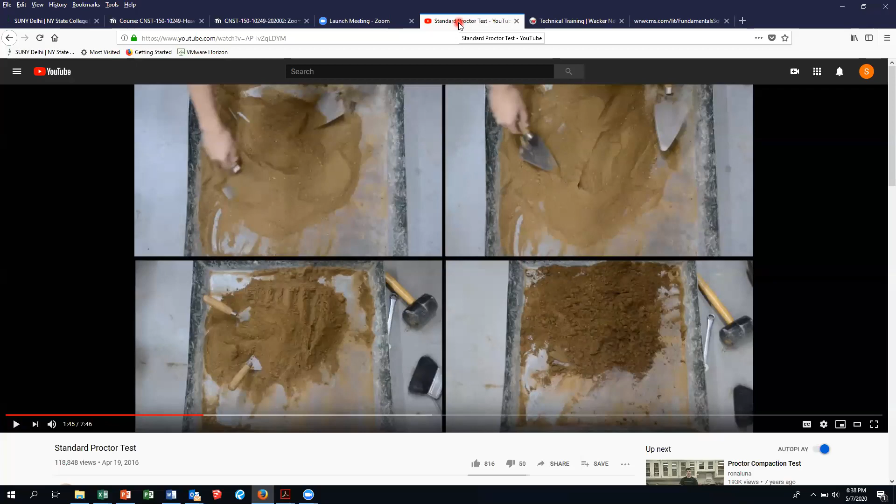So what we're going to do now is finish up on soils. The first thing we're going to do, can you see the YouTube?

I think, yeah, okay. We're not going to watch the whole 8-minute YouTube. Hopefully you've watched it. If you haven't, you should watch this before you come back in the fall, because you're going to be running these tests. This is a great screenshot because it really reinforces the fact that you're gathering at least 4, sometimes upwards of 6 samples at different moisture contents.

You can see the color of the soil as we start from the driest, just a little bit of water. Then they add another sample, okay, whether it's 5 pounds, 6 pounds, 7 pounds, depends on the size of the aggregate. That second sample has an increasing amount of water content, then the third one, and then the fourth one. Again, it's a great shot that really reinforces that you're not just running one proctor.

You're running 4 to 6, and then that takes us into the Excel we did. We started Monday night, where we had a data sheet. Half of the data sheet was for the dry unit weight determination, which was just hammering that soil in that proctor mold with the proctor hammer. And then, if you remember, after they were done weighing the mold with the compacted soil in it, they took the soil out of the mold and grabbed some of the soil.

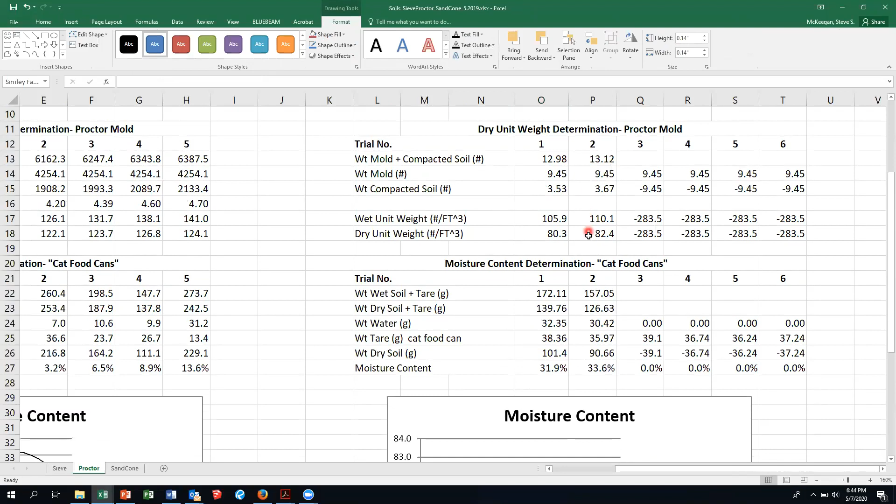Then for the next one, that was 82.4 and 33.6. 82.4, 33.6 is right about there. And there's your second data point.

Last few data points. Data 3, that's 13.19. That's 13.20.

13.18. 13.11. That's the beauty of Excel. Okay.

Now, right here, we go through and do a bunch of... that's 192.45 and 152.11. And that kicks in our moisture content.

Okay, so I don't know if you have all these numbers. So it'll take me 2 seconds. So this is 171 point, I should have done this earlier, 07, 184. Whoops, hit the wrong damn button. 167.

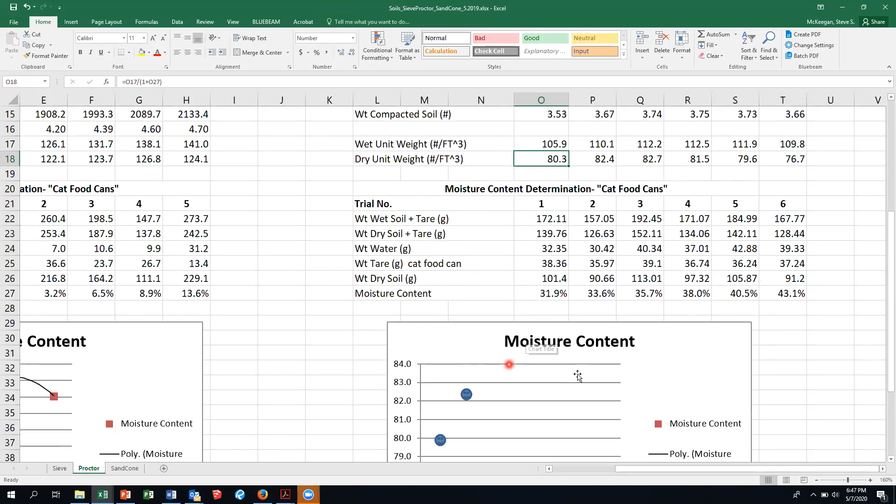So the next, I'll just do one more plot, and then eventually we're going to come back to this Proctor curve in another handout. So this was like 35 and close to 83. So there's 35, right there. And then guess what?

What is the dry unit weight doing? It comes up to a certain point, it reaches a maximum, and then it starts to go down with increasing moisture contents. And what you...

Yes. Well, the water is starting to displace the soil particles. Water is lighter than the soil particles. It's always a constant volume. So that's why your dry unit weight goes down. And that's, you always want to plot the dry unit weight.

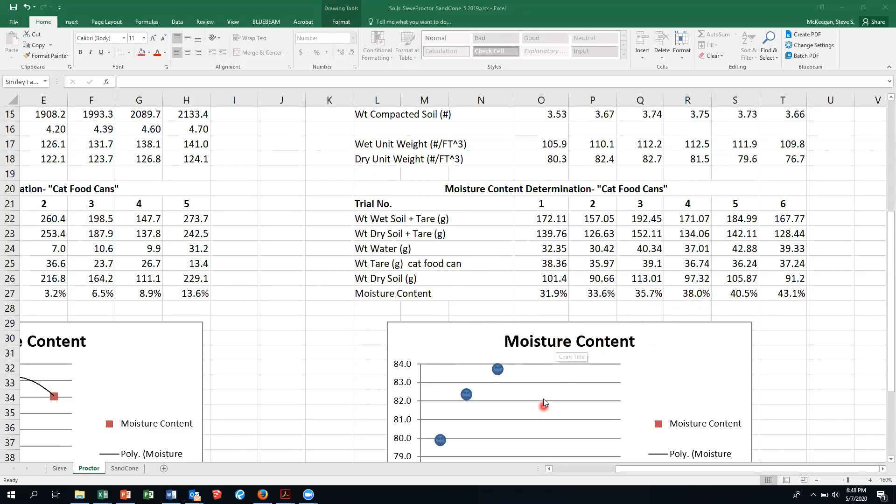So at 38 and 81.5, there's 38, and I'm just going to wing this, in 81.5. And then the last one was 43 and 76. Okay.

So there's your Proctor curve. And then the shape that you're going to do is you just connect the dots. All right. And there's, whoops, I always do that. So let's do my favorite button, which is the undo.

And right there, and we'll just play around with that. So there's your Proctor curve. Okay, I think this is the first time in 30 years I put smiley faces on a Proctor curve.

So the bottom line is, what do you do with that? What do you do with that curve? Well, the Proctor test is a lab test. And so now in the specifications, there are specifications, and you have this one.

This is soils handout number 2. It's in the soils folder at the top of Vanco Hall. And so here, this is the ET spec. Okay, and I'm not going to worry about this 3% drier or 2% wetter. We'll talk about that in the fall. But this is what we're looking at.

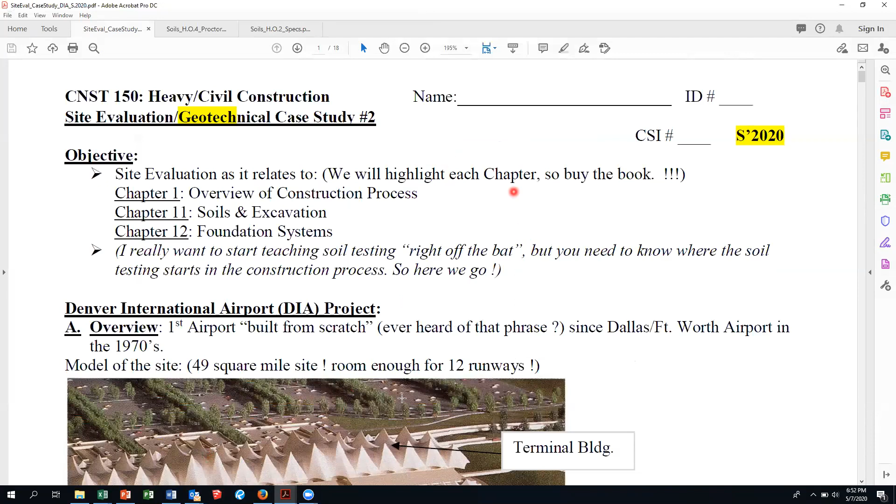So that brings us to the Denver case study. You have this in Vanco Hall. Hopefully you've taken a look at it. If you haven't, you might want to for the test, because I'm using a lot of the theory here.

So right under this week, Proctor nuke compaction. This lab packet soils is where the formula is for calculating dry unit weight. Handout number 4, using the Proctor, explaining the Proctor, is in this. And then I threw in the Excel that I've been using down below.

And then this site eval case study, DIA, stands for Denver International Airport, or Do It Again, had a slight cost overrun, a couple $2 billion. So let's go to the DIA case study.

Now, a lot of this, since we're just running out of time, remember we talked a little bit about this. This is the concrete graveyard after they had some issues with concrete. Here's an overview from the FAA tower. This is where they parked the birds.

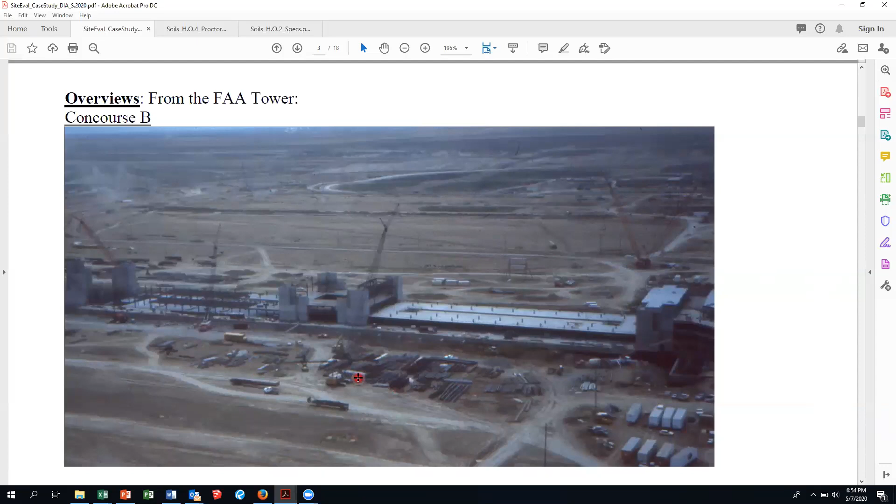So all of this soil had to be brought up, either cut or filled, to a subgrade elevation so that they could then place the concrete aprons, tarmacs, sometimes they call it, the runways themselves. Here's another shot, you can see the runway off in the distance under construction.

And here is a good pic. This is the original grade at this area. You can see where the power line was. And so what they did is called a mass balance, where they cut the high spots and move it over to the low spots.

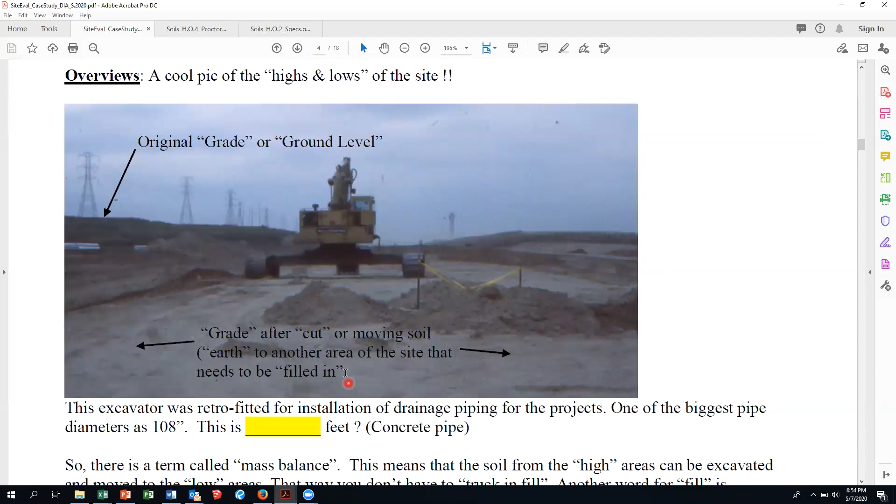Okay, so this is the grade after cut. We're moving soil, the earth, to another area on the site that needs to be filled. So cut and fill. This excavator was retrofitted for installation of drainage pipe, and just some really cool stuff. So there's our term, mass balance.

This is the machine that literally sliced the soil about anywhere from 8 to 12, maybe 18 to 24 inches into the soil. There's really no cobbles and boulders, if you will, out there. It's basically all clay, very small gravels, not big gravels.

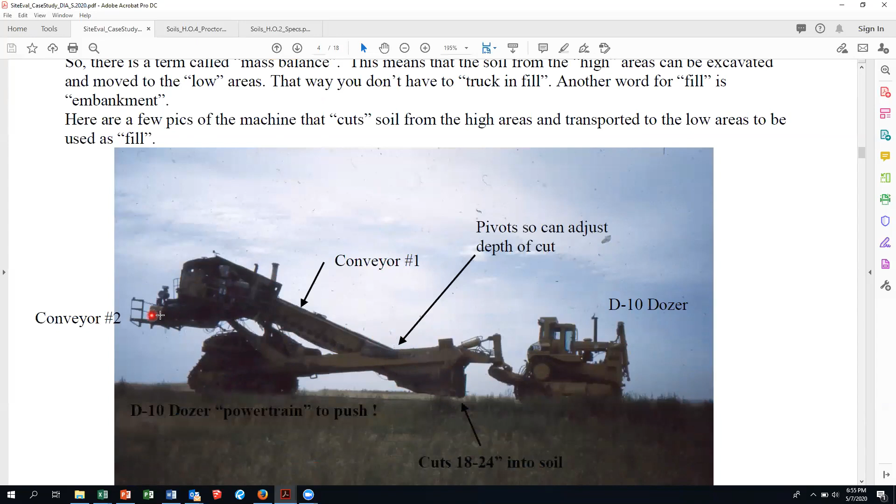But this thing is really cool. It's got a D10 powertrain to push it, a D10 dozer pulling it. And like I said, this thing pivots, so that part cuts into the soil, goes up this conveyor, goes into another conveyor at 90 degrees, and then burps out the side into these. These are called 777s.

They may have changed the number since then. This is called a belly dump. And so that's what they use to transport the soil from where they cut it, where they slice it, over to where they have to fill in.

Okay, and then they got grade stakes for fill. We're going to play around with that a little bit in surveying. So they're bringing up this subgrade, they're bringing it up to subgrade.

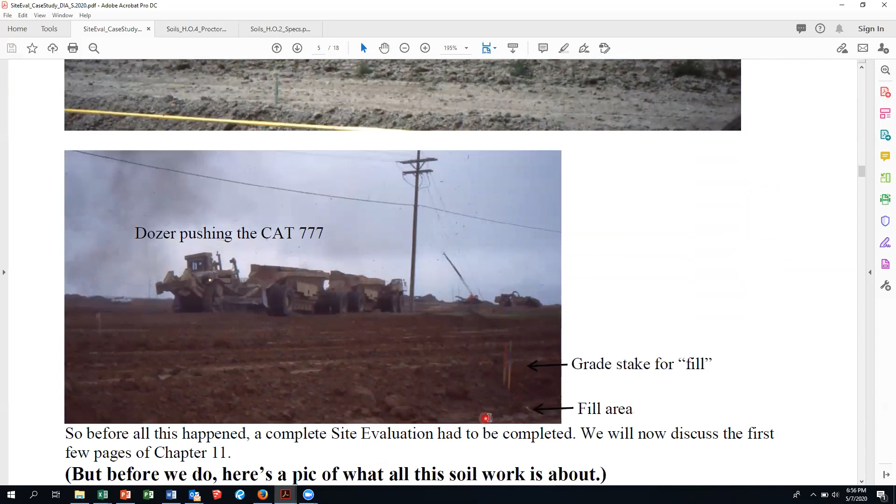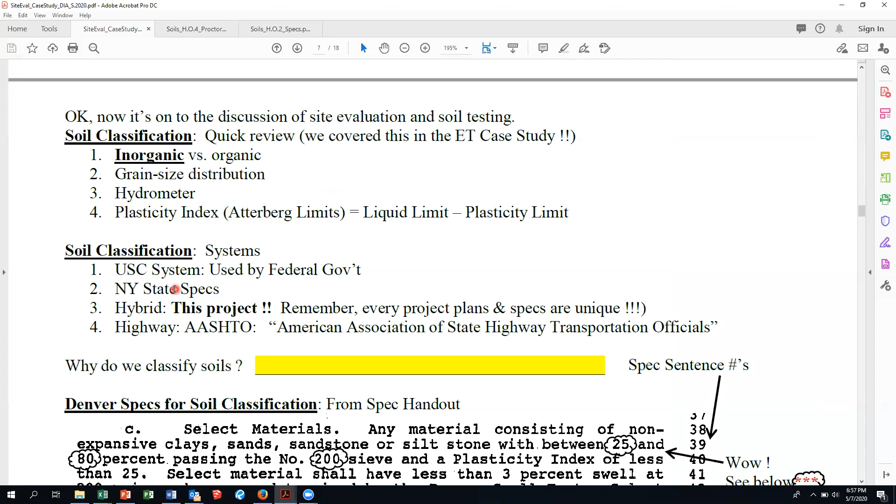This is why this handout's probably the best thing for you to use to study for the test. Why do we classify soil? What classification systems do we use? We just didn't get to New York State specs, we're going to actually play around with those in the lab in the fall. AASHTO is the highway, and then the hybrid is this project, it's a little bit of everything.

So here's the Denver specs for soil classification. They allow non-expansive clays or siltstones between 25 and 80% passing the number 200 sieve. So if it's more than 50% passing the 200 sieve, it's a fine-grained soil.

And it kicks in the left side of that chart that we generated, and I put it in. So here's the answer key.

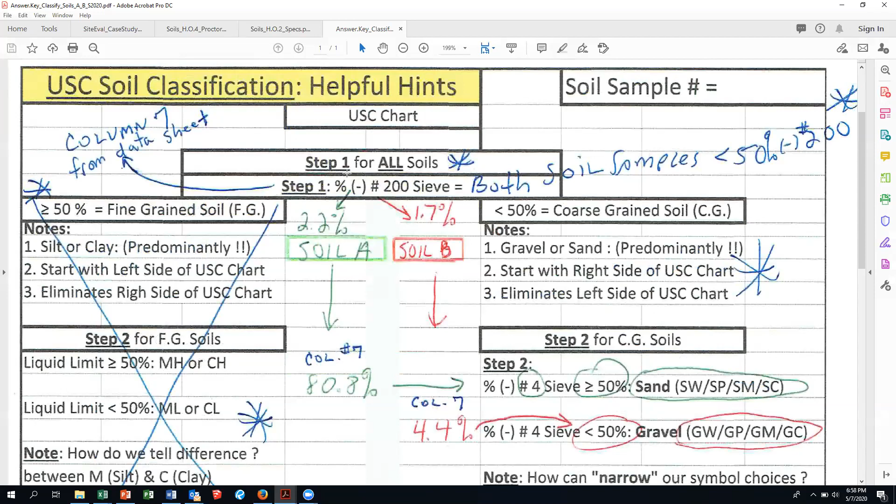Okay, here's the answer key for classifying that soil. Let me put this down here for the time being.

Both those soils were coarse grained because they had percentages less than 50% passing the 200 sieve. But if you had the Denver clay and you had anything greater than 50, then it would eliminate this part of the chart and this part would govern.

And then you got to look at something called the liquid limit. So I'll probably throw a question on here, one here and one here.

So that's a little background on that. They talk about sulfates - it has to have a maximum allowed sulfate content because sulfate is a naturally occurring compound in soil and it does attack concrete. And you can get a sulfate resistant type Portland cement.

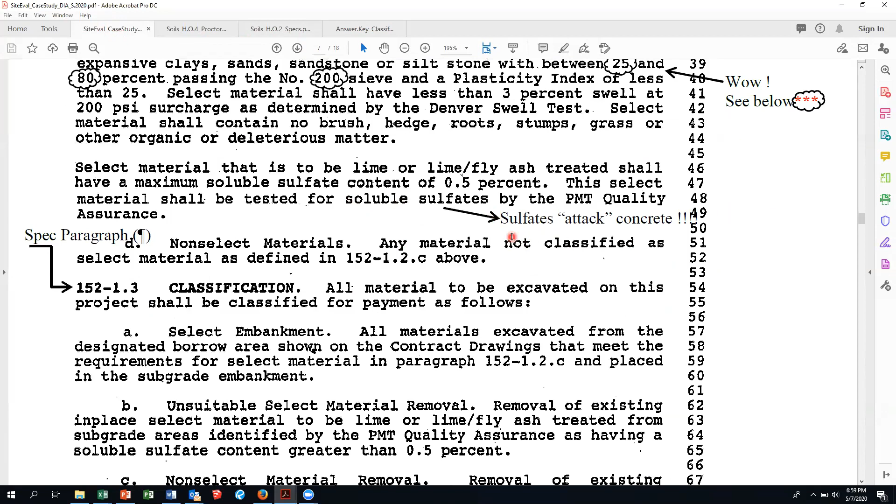Now the way they work it is a select material means that you can use it. So for these, you would do the hydrometer test, the plasticity, the liquid limit, because it is a fine-grained soil typically. If it doesn't meet any of the requirements, then it's called a non-select. Sometimes in certain projects, you'll see satisfactory and unsatisfactory.

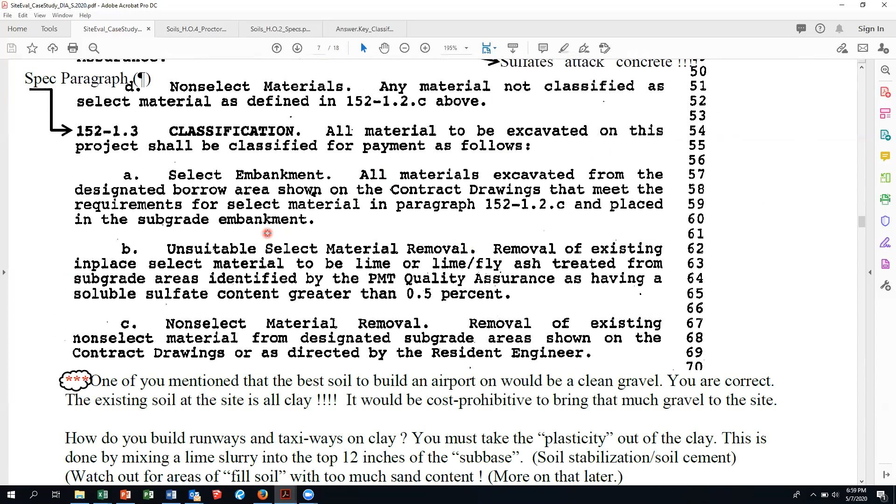So look through all these notes that I put on these specs. And then here's some - this is all my writing.

Years ago, somebody did mention the best soil to build an airport on would be clean gravel. But they didn't have that there - all they had was clay. It'd be way too cost prohibitive to bring that much gravel to the site. So that's where they do the soil cement or soil stabilization, where they're mixing that lime slurry. That's a little theory right there.

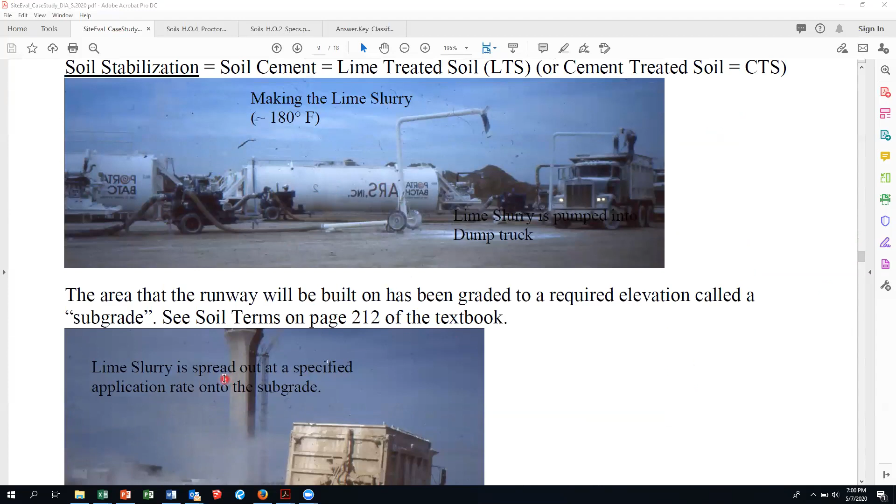So here's the lime slurry for Denver. It's mixed here, goes into this dump truck. There's a manifold on the back, and it looks like Christmas time in July. And then that's that big old rototiller that rototills that lime in and takes the plasticity out of the soil.

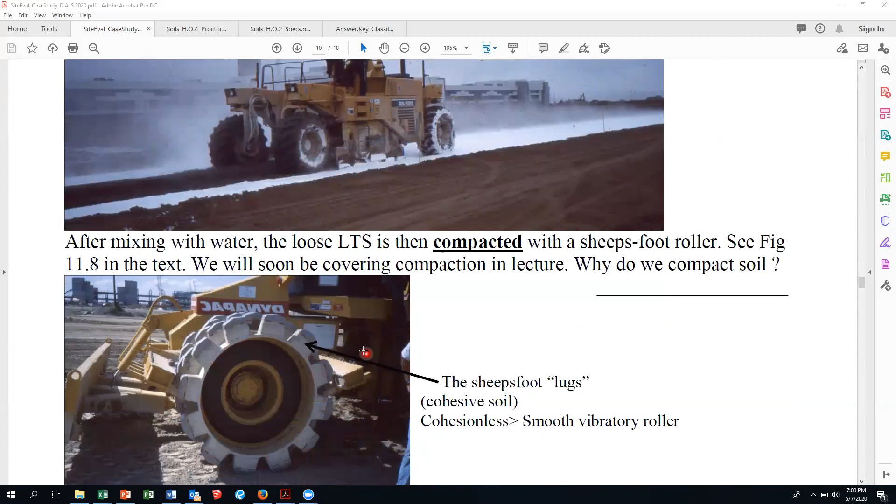And here's the sheep's foot roller that is used for cohesive soil. Cohesive soil is your clays and some silts. Cohesion-less - I don't know if I had a picture of it - this is for granular soils, you're going to use a smooth drum vibratory roller.

The sheep's foot has these lugs, and here was a great shot where this soil had been compacted. This soil definitely was just starting the compaction process. And so through repeated passes...

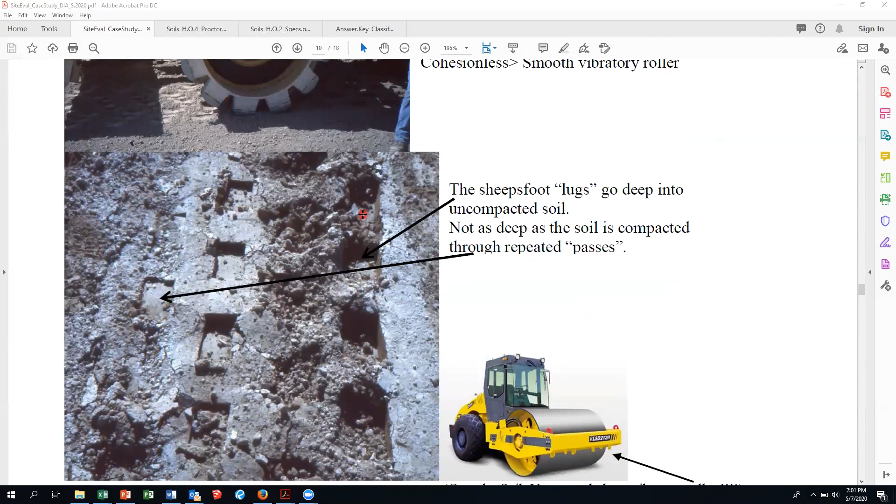Repeated passes by this machine, the sheep's foot roller, you're going to compact that soil, say to 95% of whatever the dry density was from this Proctor test. And there's the Proctor mold.

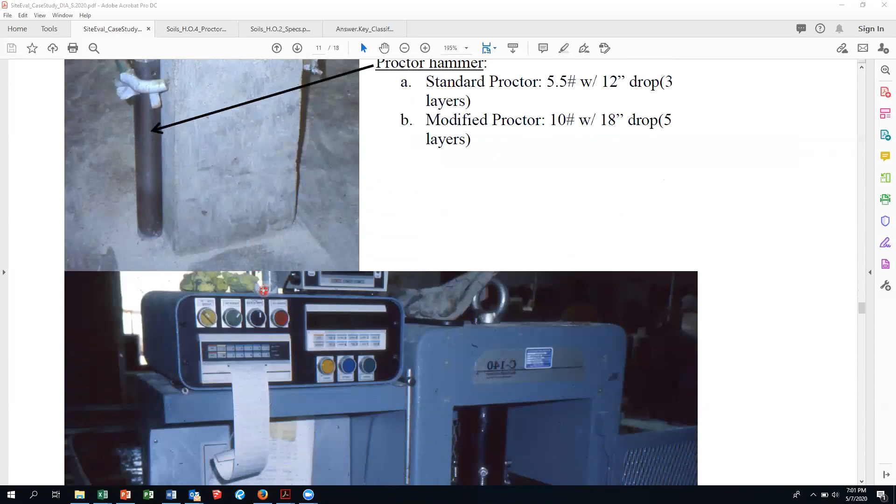So you've seen that. They also extruded what I call the soil hockey puck out of there because they had a certain spec for the strength of the lime treated soil. And they actually put that in a compression machine and they broke it.

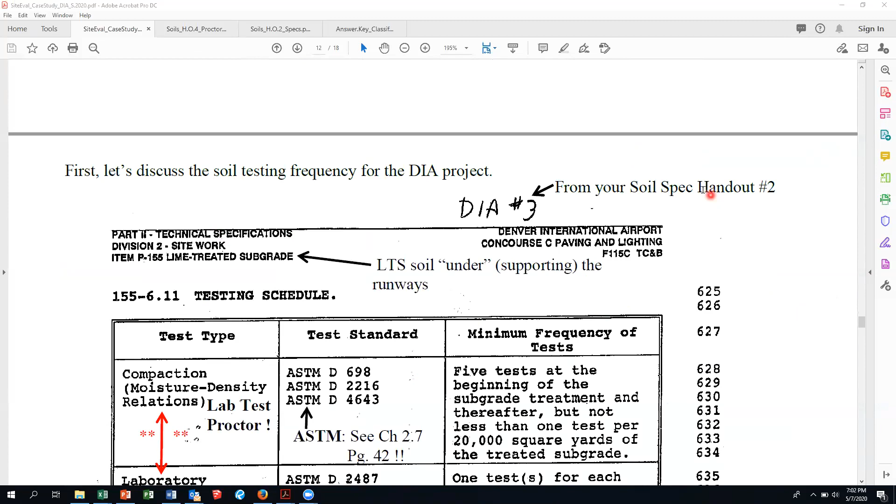So here's the frequency of testing. Moisture density relations, that's the lab test. That's tied in with laboratory classification. You classify it to see if it meets the requirements for that specific type of project.

So they say 5 tests at the beginning of the subgrade treatment and thereafter, but not less than 1 test per 20,000 square yards. Well, why are they talking about square yards? They're actually talking about area, a footprint, if you will, of the concourse, the tarmac, the apron where the airplanes park, and the runways.

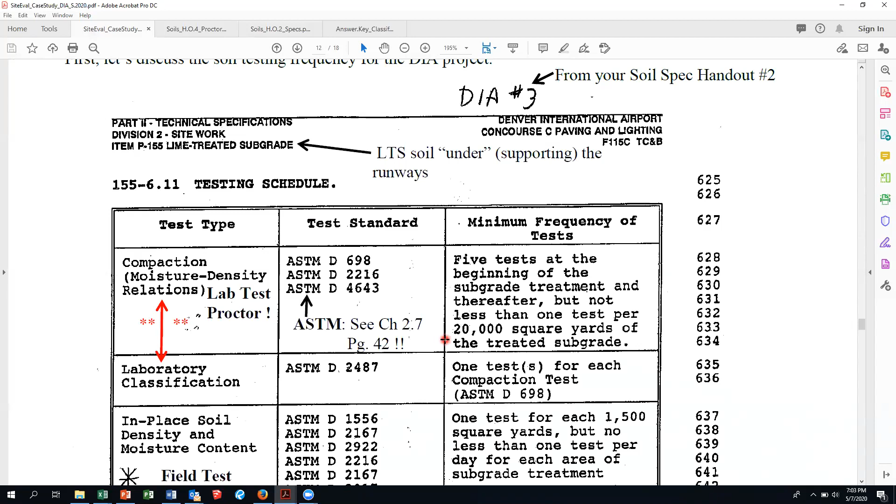So basically say every 20,000 square yards, not square feet. So I'm going to multiply that by times 9. So that's about every 400 feet by 400 feet, you're going to do a Proctor test.

In place soil density and moisture - this is a field test. This is my writing: 1 test for every 1,500 square yards. So 1,500 times 9, and you will see some units on the test. You got to know how to convert from, say, square yards to square feet and vice versa. And so you got to know your units.

Times 9 equals, and that's about every 115 by 115.

pH, that makes sense, lime content. That's the lime used for soil stabilization. There's your compressive strength. It had to be at least 250 PSI in 5 days at 100 degrees.

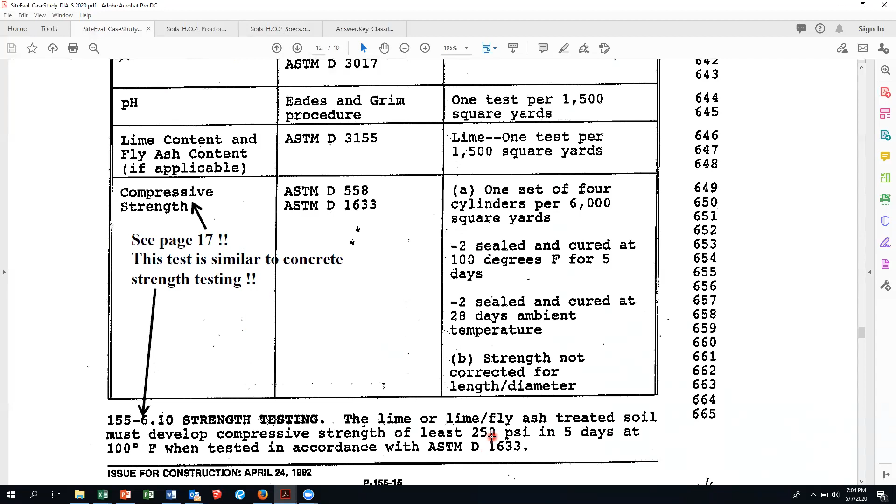Maybe if I can get some clay, we'll actually do some soil cement. We'll mix it, break it in 5 days, and see if it comes up to 250 PSI. It's very similar to the compression cylinders you fabricated for statics and strengths.

This was soil only, in other words, if they were not doing soil cement.

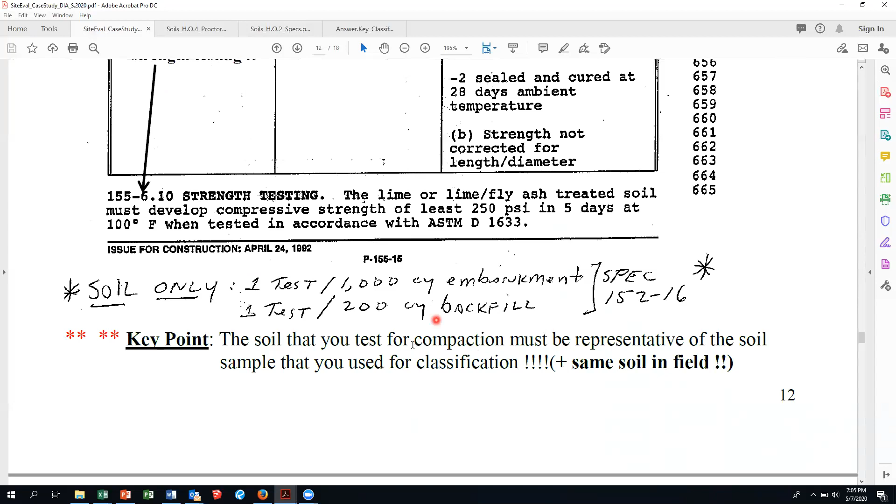Now here's the key point, that's why I put a lot of asterisks there. The soil that you test for compaction must be representative of the soil sample you used for classification. In other words, the soil you tested in the lab better be the same type of soil you're testing in the field when you compare the Proctor curve. That's key, page 12, that is key.

So there's some recap, anytime I say that, recap it. The Proctor curves are used as a standard for site compaction. Long-term soil settling is called consolidation. That's a whole nother type of study, as is the word surcharge. We'll talk a little bit about that next semester.

So here we go, back to the Denver spec for compaction, lime soil mixture. The field density of the compacted mixture, lime and soil in the field, shall be at least 98% of the maximum density of the laboratory specimens prepared by the contractor. That's the Proctor.

And right here, this 98%, they're talking about dry density, sometimes called the degree of compaction, sometimes called relative compaction. Because it's 98%, they'll just say 98% of the Proctor. If it's 95, they'll say 95% of the Proctor. So that's some of the terminology you use.

I've emailed a couple of you who are interested in soils, and a couple of you interested in surveying. But if you get to work for, say, an excavator, or even better, a material testing company, man, read up on this. This will help you for your job.

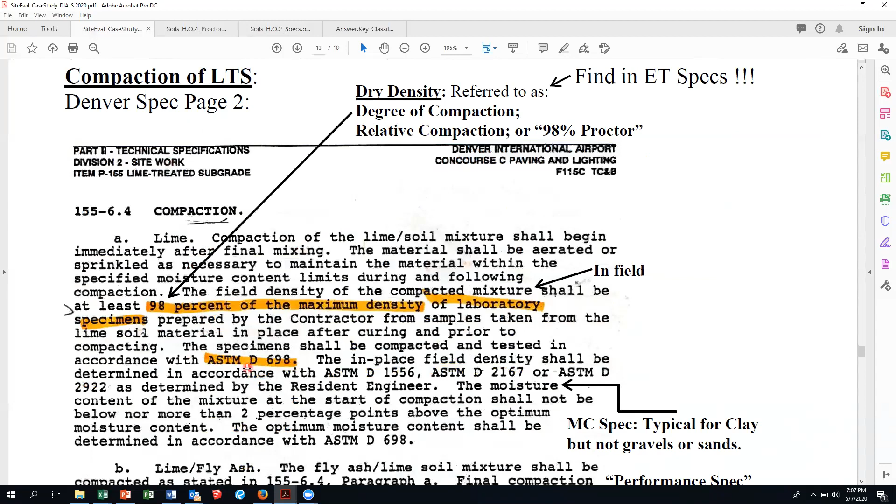The moisture content, this is a typical spec for clay where they want it always on the wet side of optimum. I'm not going to test you on that. I'm going to test you on a little chart that I've made for you.

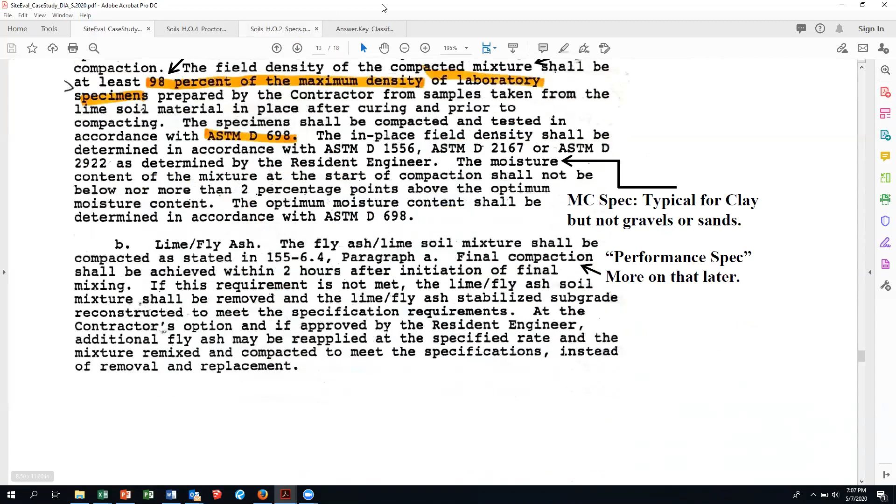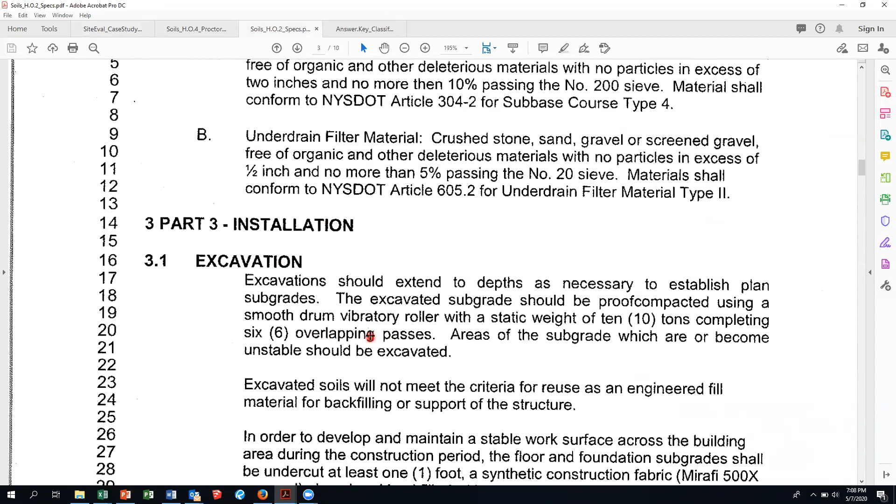This is a performance spec. It's identical to what we called the execution part of the ET spec, remember, or installation part. Part 1 was general information, part 2 was products, part 3 of the ET spec was installation. It's like a performance spec, this is how you have to perform it, and so on. So I just showed you that, for example.

Well, what do you use to test in the field? You got to get moisture and density in the field. It's called a nuclear density meter, or the nuke test. Now they're actually making non-nuclear versions. It's fascinating, the technology is unbelievable.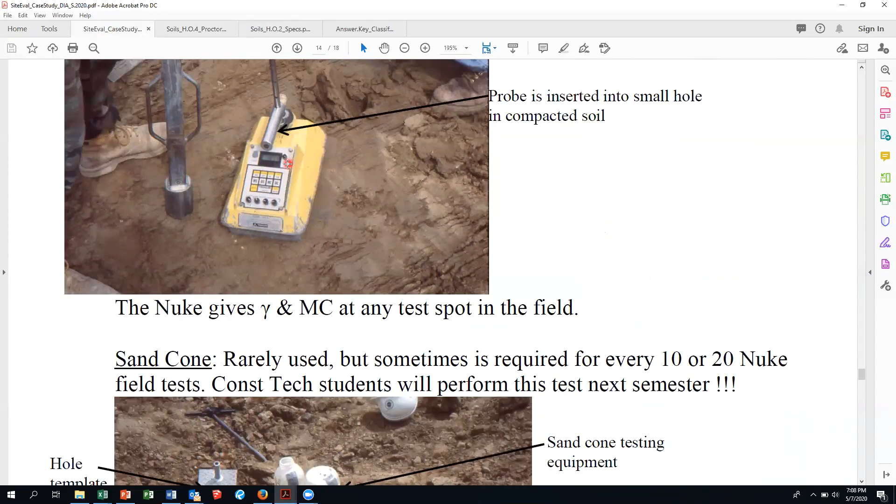There's a, where is it? It's right here, this is the hole template. So you put this template right here where the nuke is before you set the nuke in. You put that template, say, over here. You put this, oh my God, it's almost like a footing, help me out, a footing spike or whatever.

And you take this thing, which actually has the spike in it, and you pound a hole in the ground. Then the nuke sits on that, and this is a plunger that starts out at the top, and when you plunge it down, there's a steel probe that goes into that hole. And little photon torpedoes, that's technical from Star Trek, will tell you very quickly what the moisture and density is for the soil in the field.

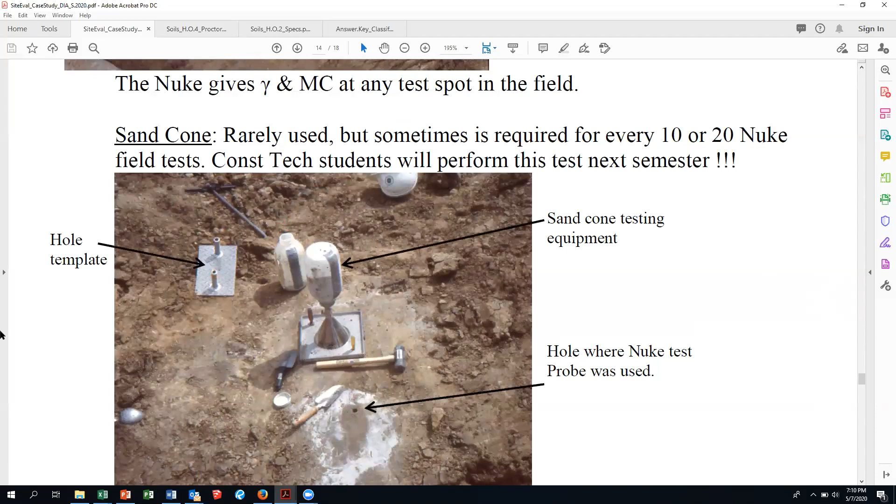Okay, this is the sand cone. You might want to remember that for the test. The Romans used it when they built the aqueducts at Segovia and the roads that supported Segovia. We don't have a nuke because we don't want the nuclear issues, a lot of paperwork for that, and they're expensive. So we use the Roman sand cones, that's a joke. I don't have time to go into that, but you will actually run that test in the fall.

They also do something for testing stability. I'll show you what's known as shaky silt in the fall. Also show you the taste test for soil. Grosses people out, but you can do it. Just make sure it's inorganic soil.

This is what you've got to study for the test this coming Wednesday, May 13th.

You run the proctor, that's the lab test. You graph the proctor and highlight on the graph the maximum density and optimum moisture content. Now for clay, the moistures are very high. For granular soils, like gravels and sands, they're much, much lower.

The DIA specs, that paragraph said that the percent proctor, or relative compaction, was 98% of the maximum dry density.

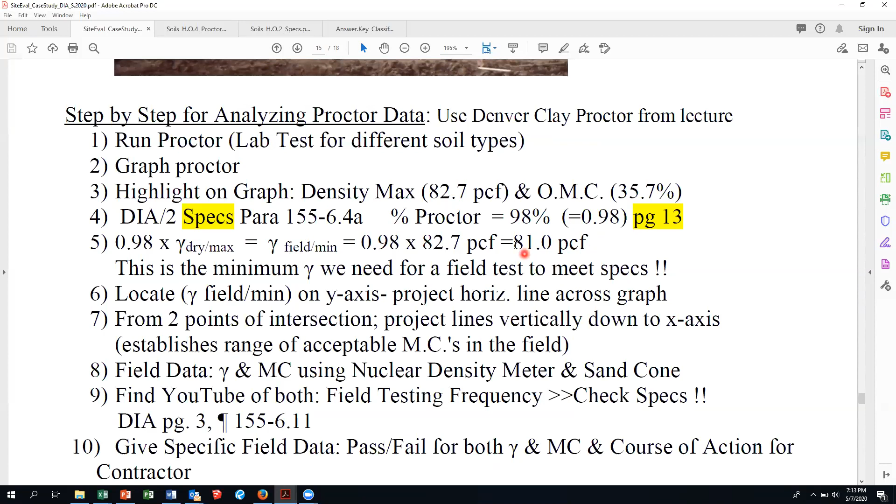PCF, pounds per cubic foot. So we need the nuclear density meter, or the Roman sand cone, to register at least 81 pounds per cubic foot minimum for us to meet compaction in the field. If it was 95%, then the standard is not as high.

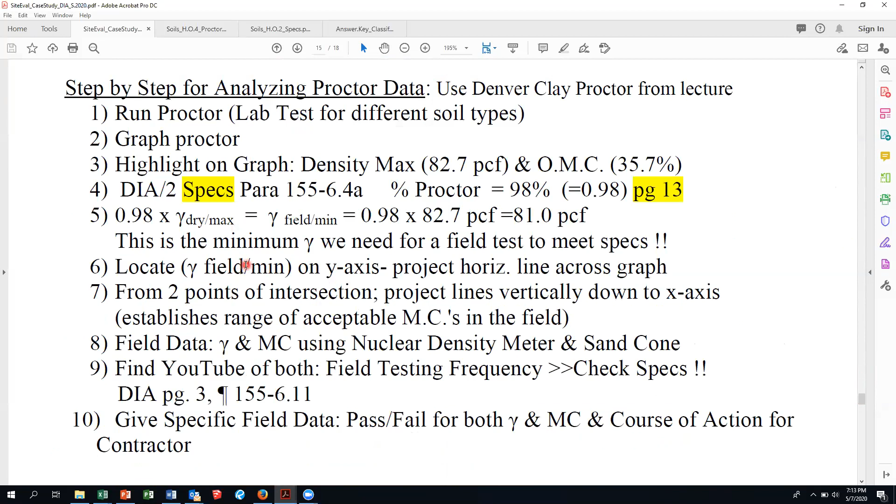So I used it for Denver, even though it was from Texas. I said, close enough for government work. And...

So again, the end of 15, the beginning of 16. I'll tell you what, you go work for somebody and get a good command of this theory, their heads are going to turn. Soils are very misunderstood.

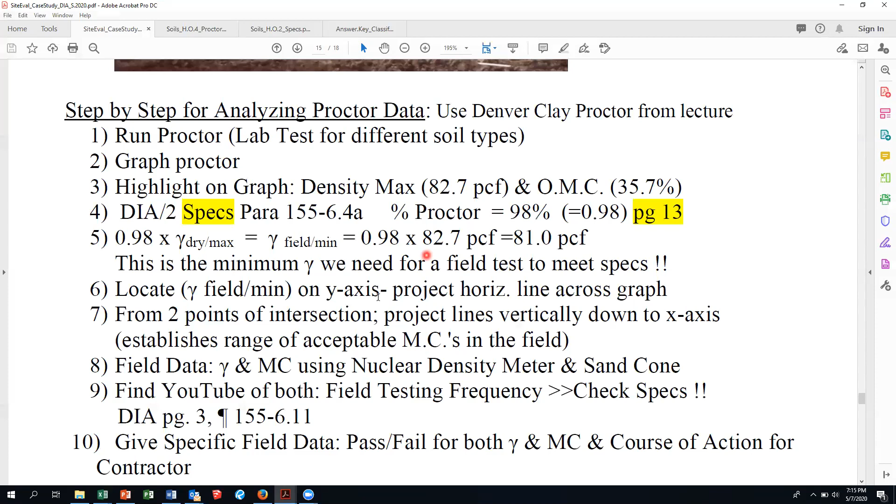So everything we talked about here, right? 98% of that number is 81, 81 pounds per cubic foot.

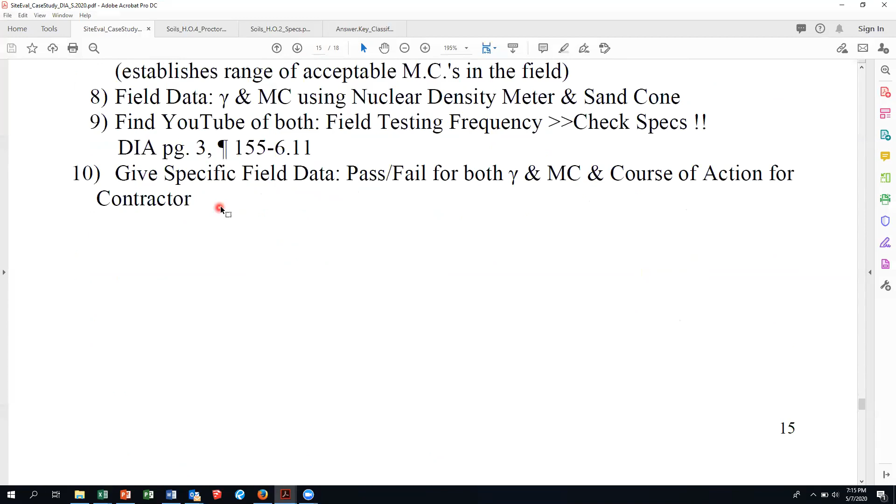So what you'll do is, step 6 says to locate a line across the graph for that minimum field density. Well, if you go to 98% of the maximum 82.7, which is 81, draw a line across the graph. How many points do you intersect the proctor curve?

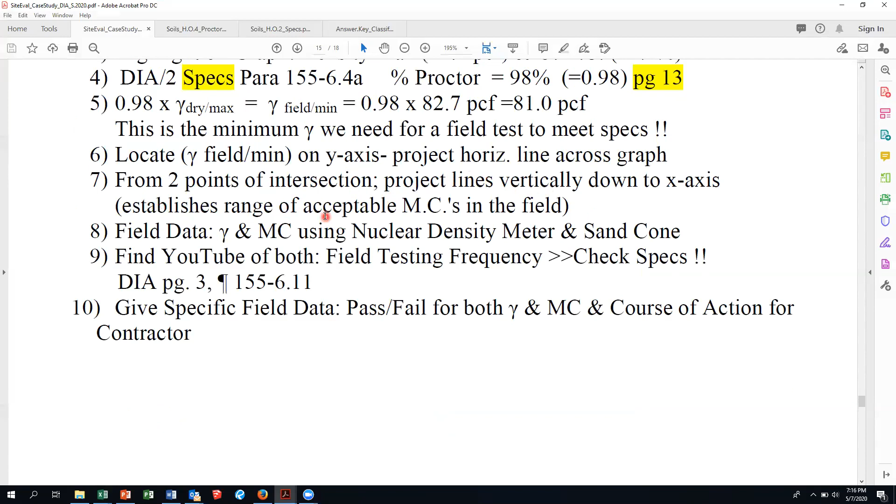Two — you intersect it here, and here. From the two points of intersection, project lines vertically down to the x-axis. It establishes a range of acceptable moisture contents in the field.

In other words, and it's not exact science, but it's damn close — between this point and this point, if you run that sheep's foot roller enough passes, up and down on the soil being compacted, you should be able to get 81 pounds per cubic foot, which is 98% of the maximum dry density you got in the field.

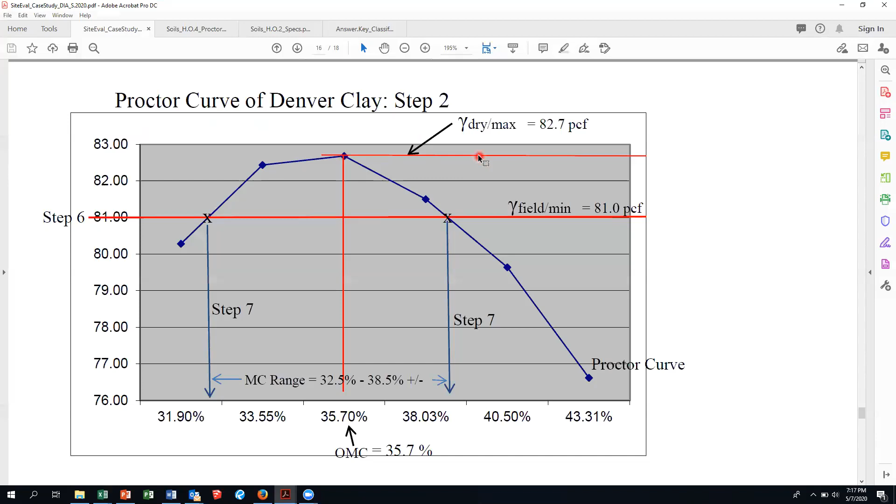Now, one thing we didn't talk about is when you move that soil from the high points to the low points that needed to be filled, you have to compact that soil in lifts, typically 8, sometimes 12 inches — L-I-F-T-S, basically a pancake. If you just move the dirt 4 feet vertically at a time and try to compact it, you'll never get the entire depth compacted to spec. You've got to do it in thin lifts. Does that make sense or not?

So, like I said, it's not back in 1977, so I won't smoke my Marlboro like my old teacher did. Okay.

So here, if our field test is between 32.5 and 38.5, we know with enough compactive effort of the machinery that we can get this minimum field density. So let's go through some of the tests.

These are actual tests that I made up. That's an oxymoron, sorry about that.

DIA, Denver International Airport, clay. Nuke results. We love nuclear power.

See if everybody's awake. You guys awake? Everybody's sleeping, holy shit, it's the third course in a row. I don't blame you, so, shouldn't have said that. Hey, it's my last Zoom. So, do we pass or do we fail?

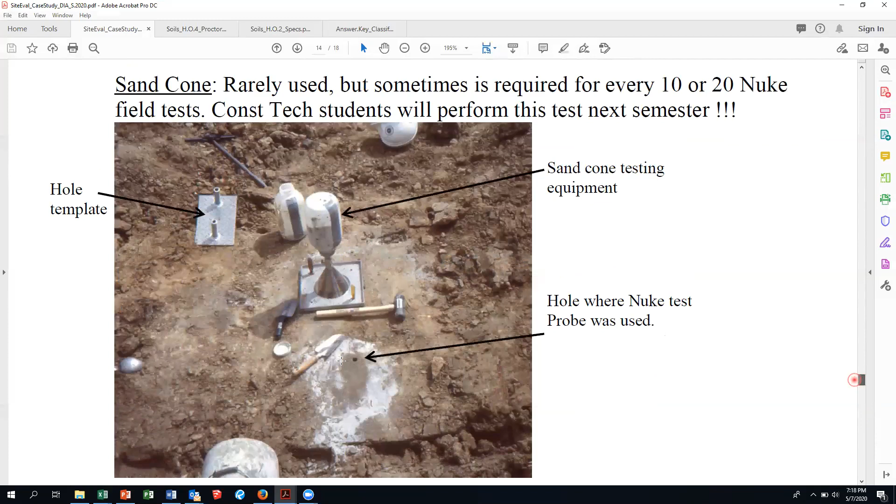So let's look at some test results. They're out in the field, using the nuclear density meter. And the nuclear meter, the little photon torpedoes from Star Trek, told me that the moisture content of the soil was 35%, and the density was 81.5 pounds per cubic foot. Well, 35 is in that range, and 81.5 is higher than 81.

This goes back to the YouTube video where they did that same horizontal line at 95%. They use 95, we use 98. 95% of whatever that maximum density or unit weight number was. Draw that line across, go right down, drop 2 vertical lines where it intersects the Proctor curve, and there's your acceptable range of water content. So we're just reinforcing what they said in that video.

Now let's go to another test. Don't forget that in the spec it said we had to run an in-place density test, the nuke, every 1,500 square yards. Let's say we went to another part of the runway, and the nuke told us our moisture was 36.5%, and our density was 76.5. Well, the moisture, 36.5, is still in that range, so we're good with the moisture. But we're low on the density, which had to be 81 pounds per cubic foot. That meant I don't have to mess around with the moisture, I just got to hit it with more passes with the sheep's foot roller and then retest it.

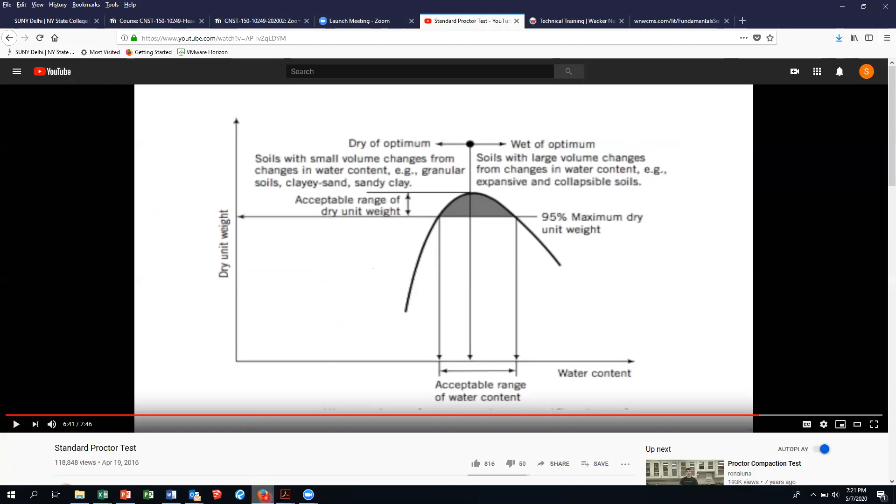So you do more passes with a sheep's foot roller. And the technicians and contractors are really good at knowing about how many passes it takes to get compaction. That's also part of the technical booklet that I had you look up on the internet, which gets into the science of the energy of a sheep's foot roller or a smooth drum roller. Don't forget, the soil you are analyzing with the field data versus the Proctor, they've got to be the same type of soil. Wait till you see some of the Denver Proctor data sheets I'm going to show you in August, it's really hard to do, it's an art.

So let's do another test, getting into another 1,500 square yard footprint of the runway. Now that moisture is 30%. Well, 32.5 to 38.5 was my range, and the density was 78. That makes sense that it's low. This is called the dry side of the optimum range. This is the optimum range right here, we're on the dry side, we're below 32.5, we're only at 30. You literally got to rip it up.

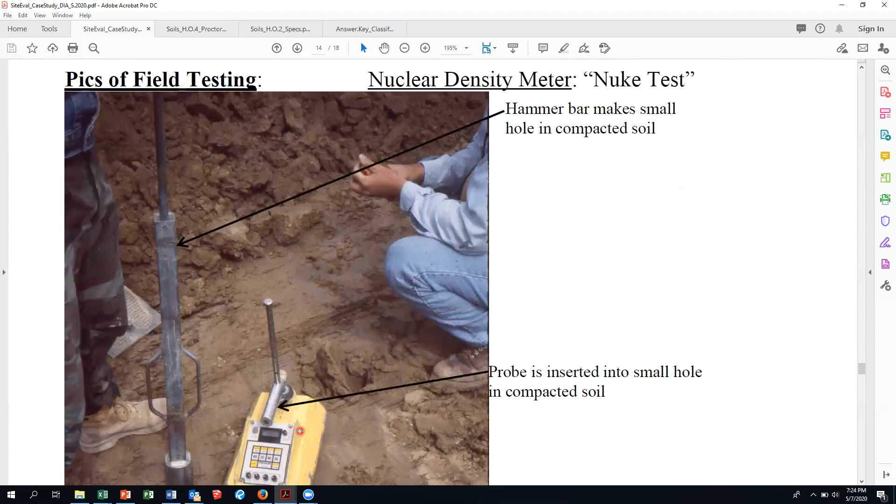What they used to do is rip it up with ripping teeth on a bulldozer, then add water. I have that on a video, but I did not get it converted, and I'm not allowed in Smith Hall to get it, so I'll do that for you in the fall. You literally add water with a big water tank using a fire hose. They mix the water into the clay with a disc, like a big farm disc. Then you check the moisture content with the nuke to see if you need to add more water, because you can use the nuke just to check moisture before running all these passes. No sense running a bunch of passes if you haven't added enough water to bring it into the moisture optimum range.

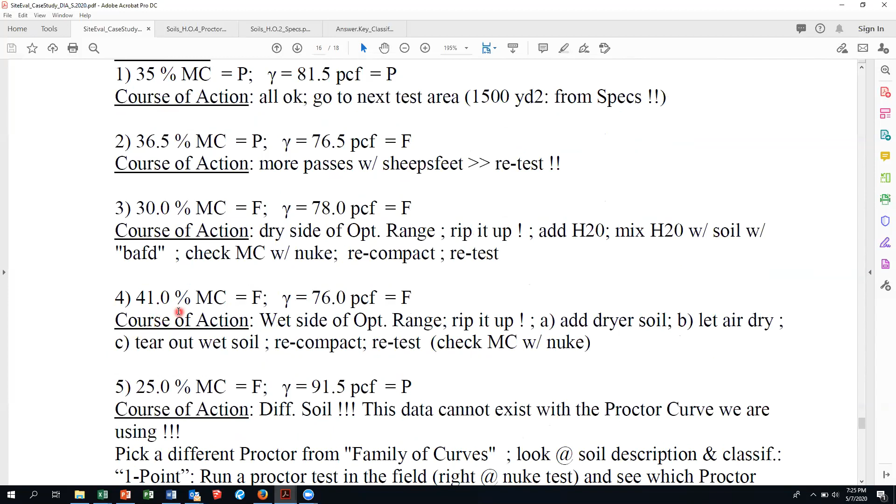So then we did another test, another 1,500 square yard footprint of the runway. Now we're at 41% moisture, and our density is 76. 38.5 was the upper limit of the optimum range. We were at 41, so now we're on the wet side of the optimum range.

What was I going to say? I forgot. So when you're on the wet side of the optimum range, this is a problem. It's hard to do. You got to rip it up. You can either add drier soil, let it air dry, or tear out the wet soil and bring in some drier stuff. This one is a hard one to remedy, a hard one to fix.

Adding water, if you're on the dry side of the optimum range, is much easier. You have to then recompact, retest, and check it again. Not only do you check the moisture content, but you also check the density, the field density.

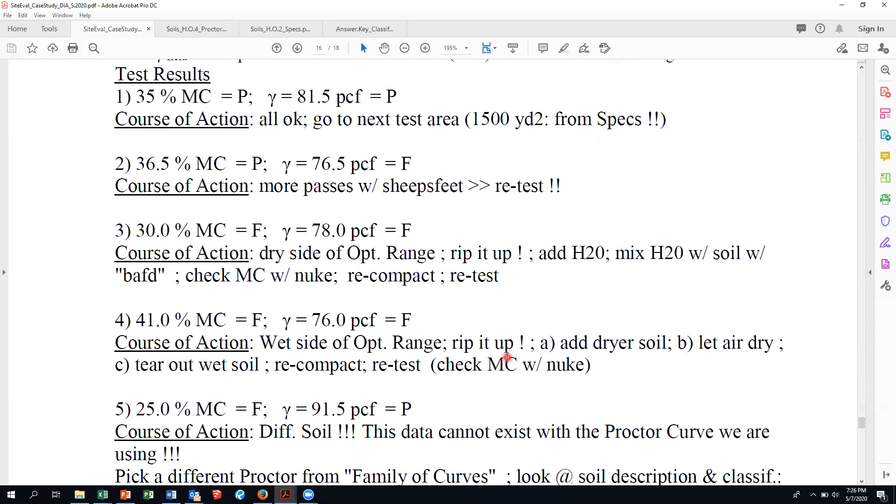What the testing labs did out there is they brought out mobile testing labs. They brought out a little trailer with all their equipment right in there.

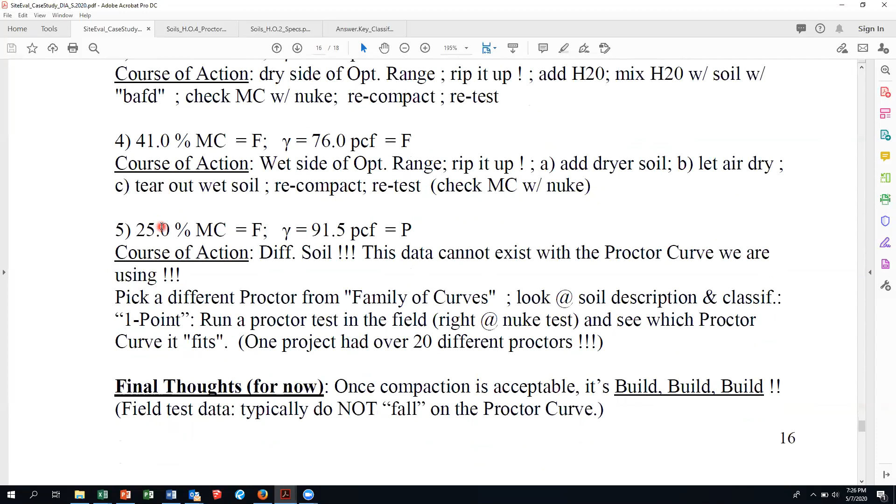Because every once in a while you get this type. You got another test here. Now all of a sudden it's 25% moisture content. It makes sense that it fails because that's less than 32.5 - it's not in the optimum range. But this part doesn't make sense: the density is 91.5 pounds per cubic foot.

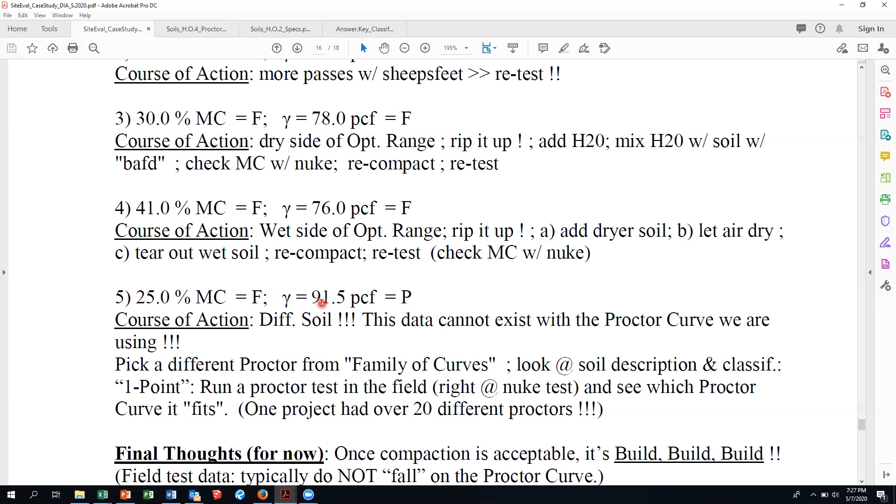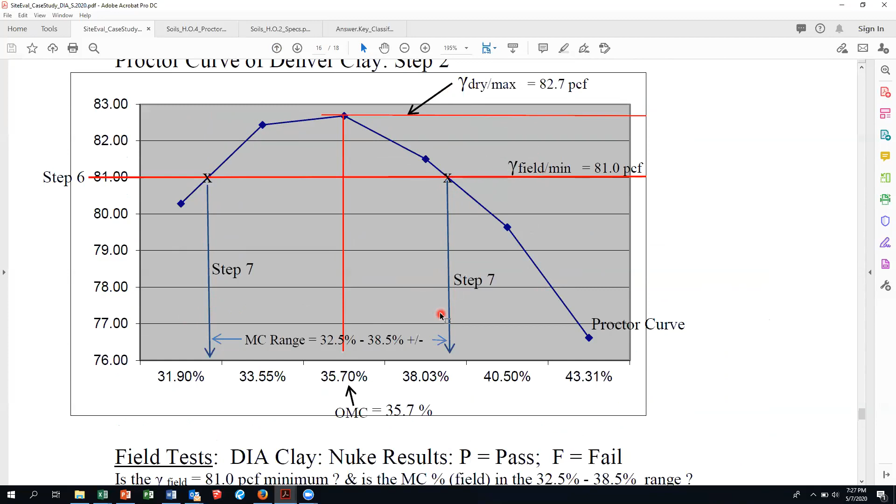This brings me to an important point. These field tests do not fall on the Proctor curve. The Proctor curve is with that little rammer, and that's only done in the lab. All you're looking for is whether the field tests are acceptable, dealing with the minimum density and the moisture optimum range. So these are not going to hit the curve - they may, but it's a fluke.

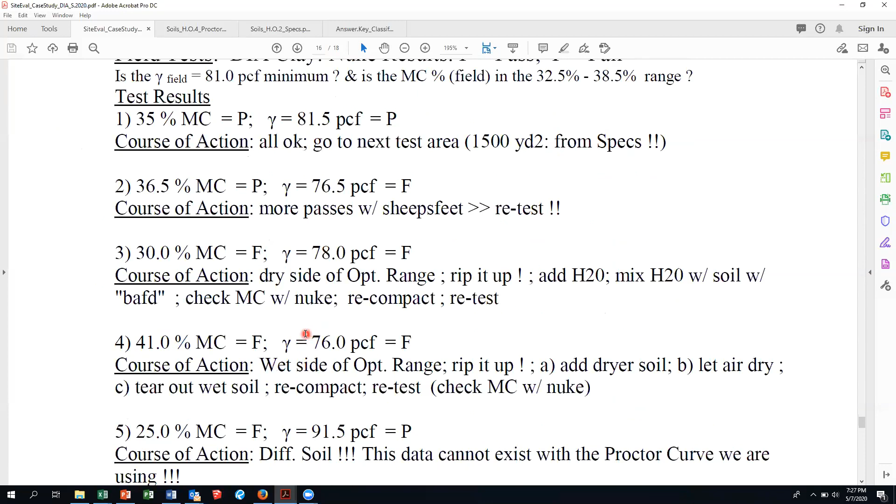This is used with the rammer. All of this compaction is done with the sheep's foot roller for this Denver project. We don't go running around with a bunch of those little Proctor rammers compacting the soil - that was a joke. So this means that the results from this soil test means that it's a different soil.

You'll really impress somebody if you know what a 1 point is. If you can't figure out what Proctor curve to use from, say, there were like 20 or 30 curves they had to work with, because soil, when you test it, or just soil in general, varies quite a bit. As my boss out in Denver said, we're asking soil to be consistent, and it is anything but. As one contractor said, he used to have nightmares, and the two subjects of his nightmares were density and moisture content.

So you can run a Proctor test in the field because they had a mobile lab. Right at the nuke test, grab some of that soil out of the subgrade and hammer it into a Proctor mold. The data point from there - the data point from a 1 point, which is a Proctor test in the field - will fit on one of the curves from your family of curves.

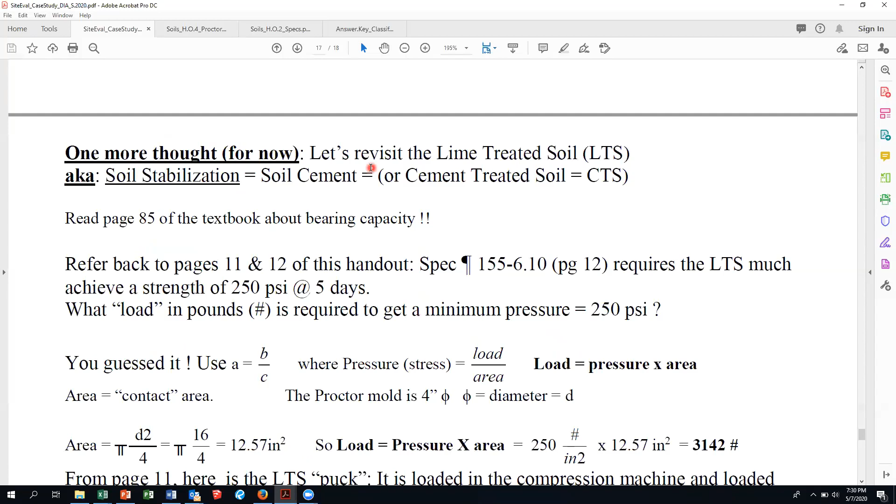Okay, now, real quick, this - it's fair game and you should know how to do it.

One more thought. That lime-treated soil, also known as soil stabilization, soil cement, or cement-treated soil (CTS) - the testing company put that hockey puck after it cured for 5 days. The lime literally stiffens the clay, and it should handle 250 PSI.

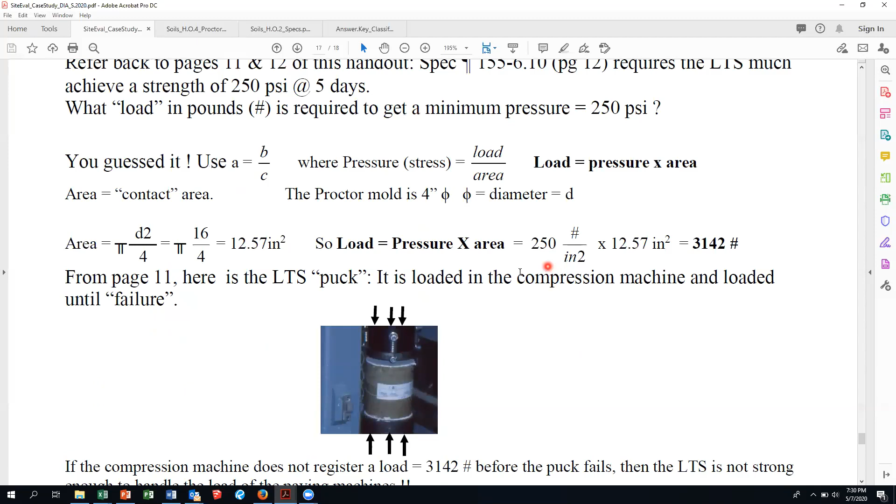Now, in the field, it did fail. In one part of the project where I worked, the lime-treated soil compression cylinders, or compression samples, failed. So before they ripped out all that work, they decided to perform an in-place field bearing test. This is more statics and strengths, but the theory is the same. So they prepared a surface, kind of shaved the clay.

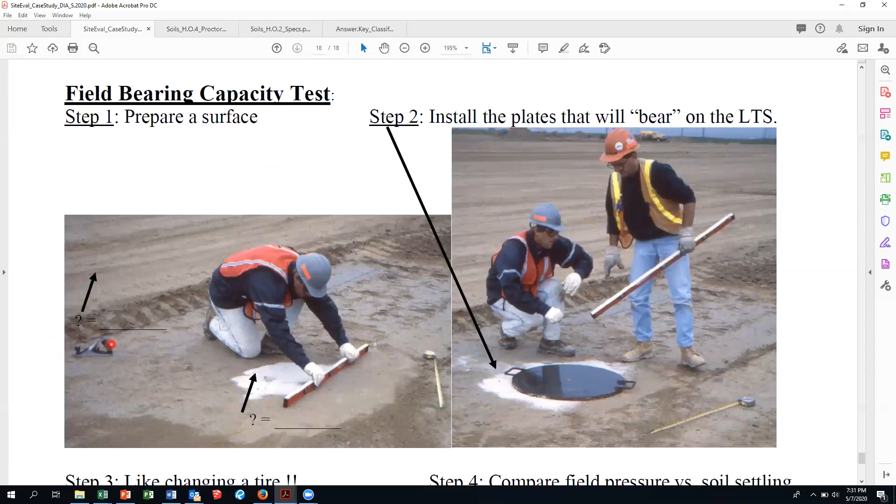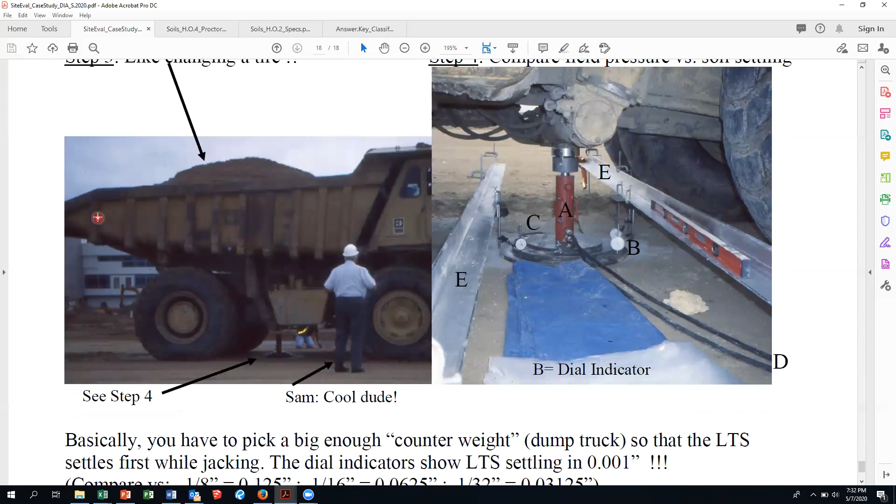So they lay these plates down and they're going to jack against it. But what do they use to jack against? A dump truck, an end dump with a shitload of sand in it.

Sam was a retired guy that came out of retirement and worked. He was one cool dude. He'd be about 150 now - well, just kidding. Really great guy. I learned a lot from him.

So you have to pick a big enough counterweight so that the lime-treated soil settles first while jacking. These dial indicators can show movement as little as 1/1000th of an inch.

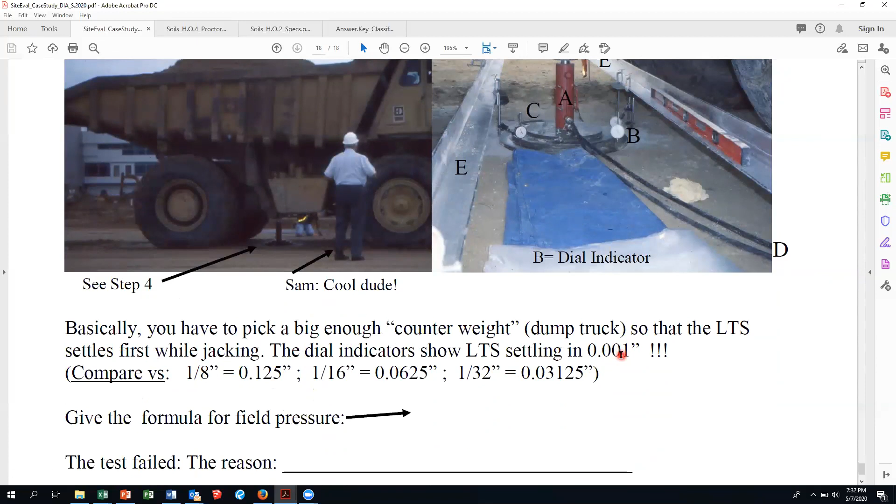And what happened was - I don't have the pictures, I think I just have videos, I'll get those converted - the actual strength of the lime-treated soil in the field confirmed the bad test results of the lime-treated soil hockey pucks from the Proctor mold. And a million dollars later - I think it was a million, let's just say it was a million, it sounds good, it's 25 years ago.

They had to go through and rip all that up, and put down a blanket of Portland cement, mix that in with that big rototiller, water it, compact it, and that's how they got their strength. In other words, you need a minimum strength of that soil to support the runway.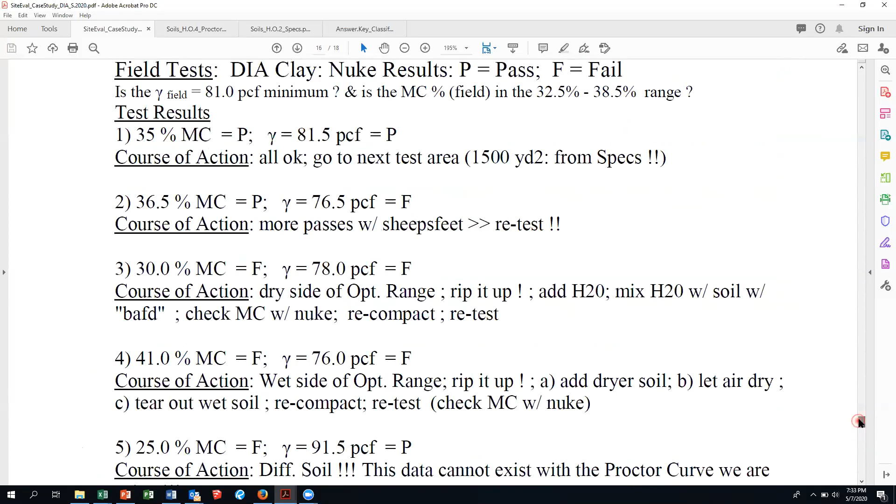So this is a great handout. Where is that runway? Oh, there's the hockey puck again. So there it is. This lime-treated soil has to be strong enough to withstand these two slabs and, of course, the weight of the airplanes taking off and landing.

Let me just see, those are statics. We talked about soil handout number 2 with the specs. So I'm going to throw some questions at you about using specifications that may even be out of the Denver one.

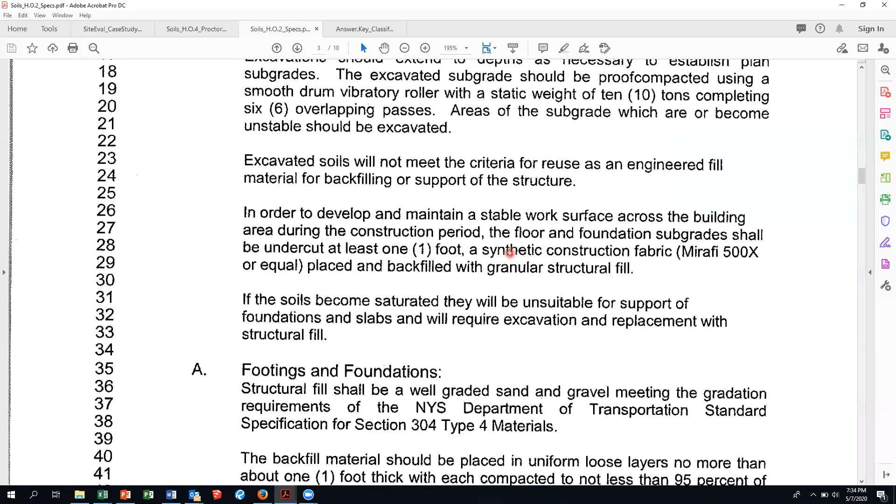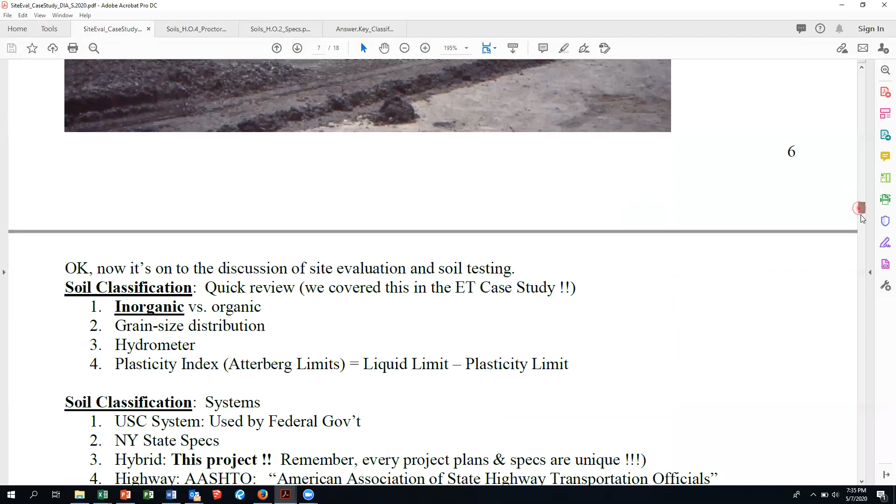We talked about specs, we talked about nukes, we graphed a few points. I think your best bet is, as one of you said, you go through the Zoom and read along with this handout. It was fun actually making this handout as a step-by-step primer for soils. It's very basic, geared more towards the technician in the field and the contractor, rather than engineering, but it does use some engineering concepts.

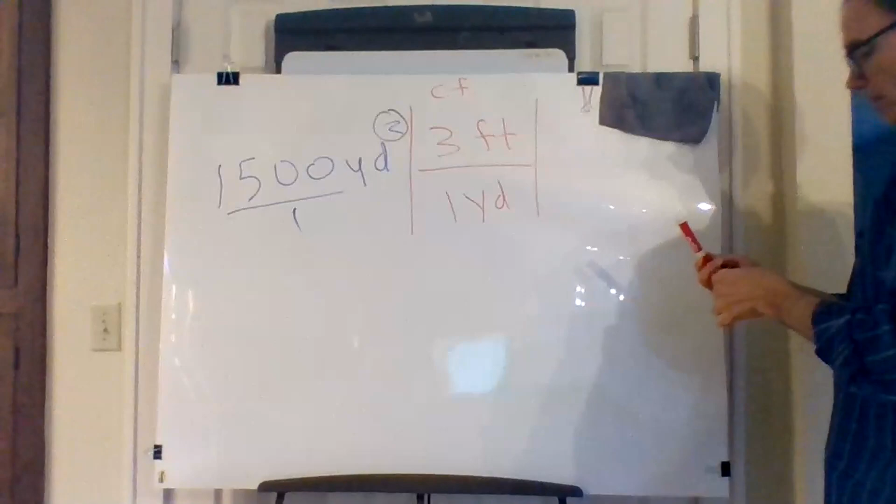Square the beast. This is like a Dr. Seuss thing, you got to square everything within that bracket. This is when I write down CF, that is a conversion factor. So because this is squared, 3 squared feet squared, 1 squared yard squared, green eggs and ham, Sam I am. See, it's Dr. Seuss. Sorry about the shadow, don't like it.

Let me see if I can try something different with the lighting. Is that better? No? Okay.

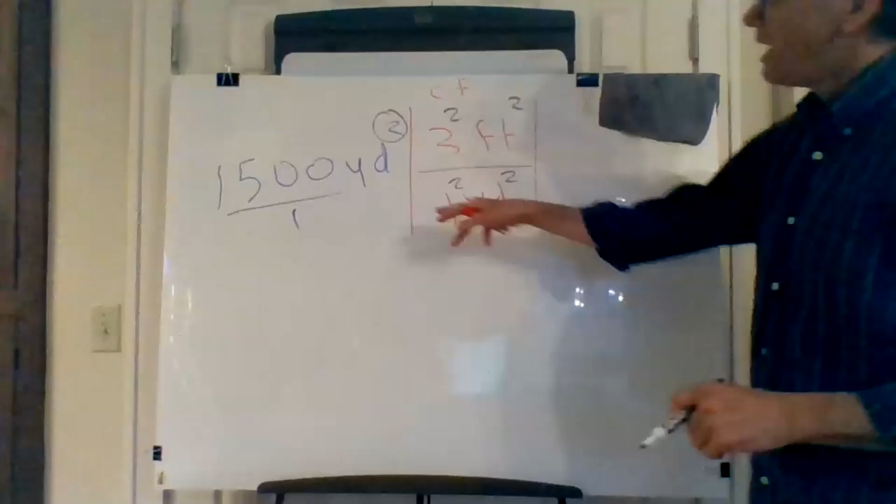And then you got 1,500 square yards times 9, and you're left with square feet because yard squared divided by yard squared is 1. It cancels, okay?

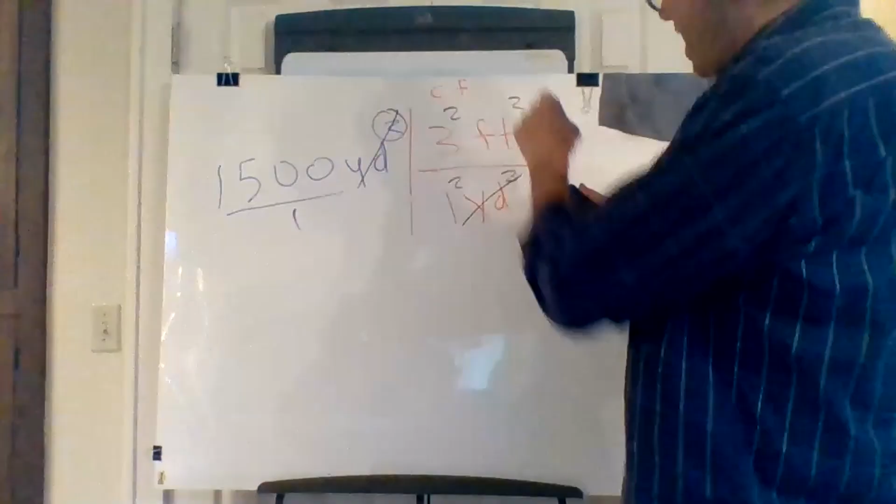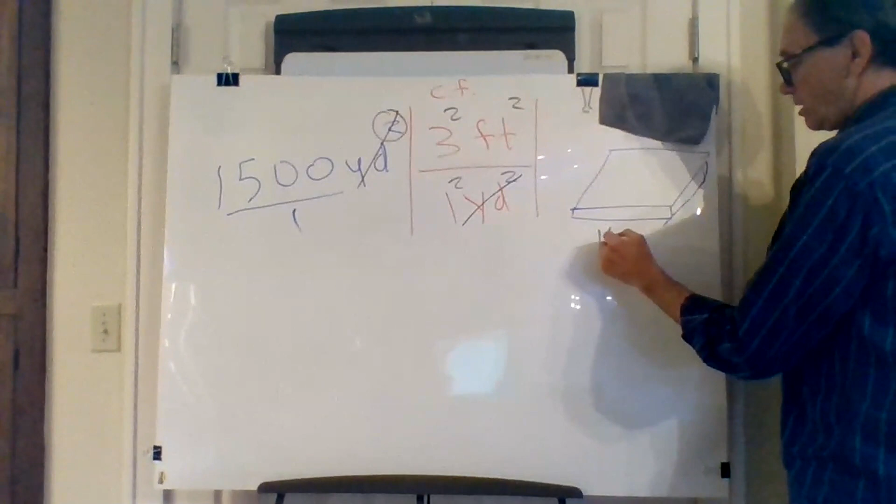Now, let's say you started out, and you can do that because this is America. Let's say that you had, right, that'd be 1,500 times 9, so it'd be 13,500 square feet. If I took the square root of that, shift square root, then it's about every 116 foot footprint of surface area that you got to run a test on. And that's called testing frequency.

Now let's just, for shits and giggles, whoops, shouldn't have said that. So let's just say that, I don't know, let's pick 2,000 square feet, and I want to convert that to square yards. I just made this number up. This is not actually from the specification.

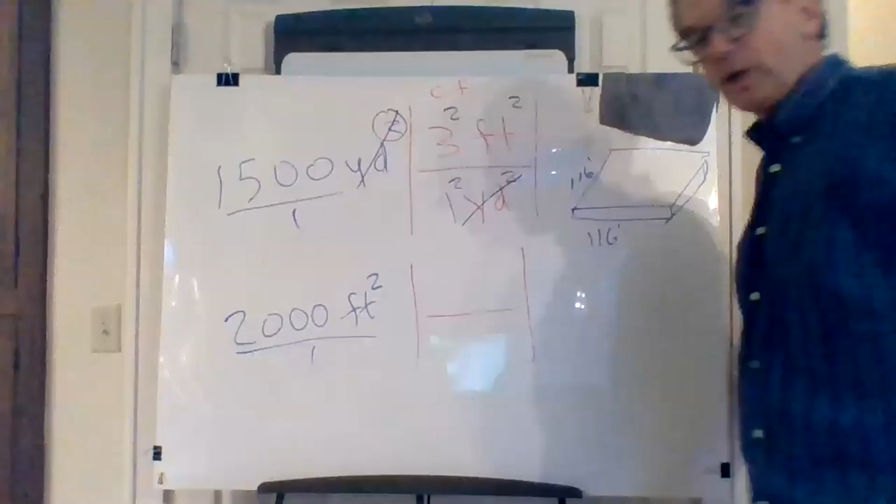Go back to your conversion factor. Always put this over 1. Don't forget, the math that I do is voodoo. I'm so old that I learned this and I don't remember, but they're all shortcuts. Because feet squared is in the numerator, it's got to be right here: 3 feet, 1 yard. If it were just feet, I'd be done.

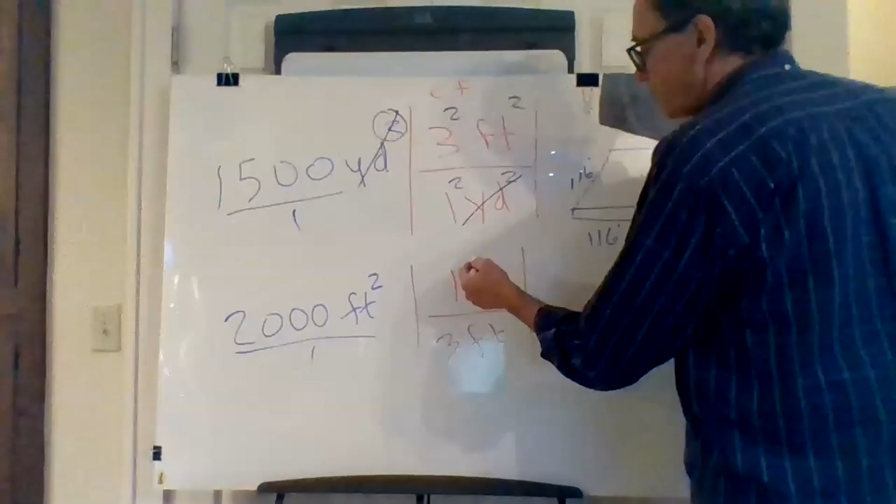But it's feet squared, so now what do I got to do? Square the beast. 1 squared, yard squared, 3 squared, feet squared. Feet squared cancels, like that.

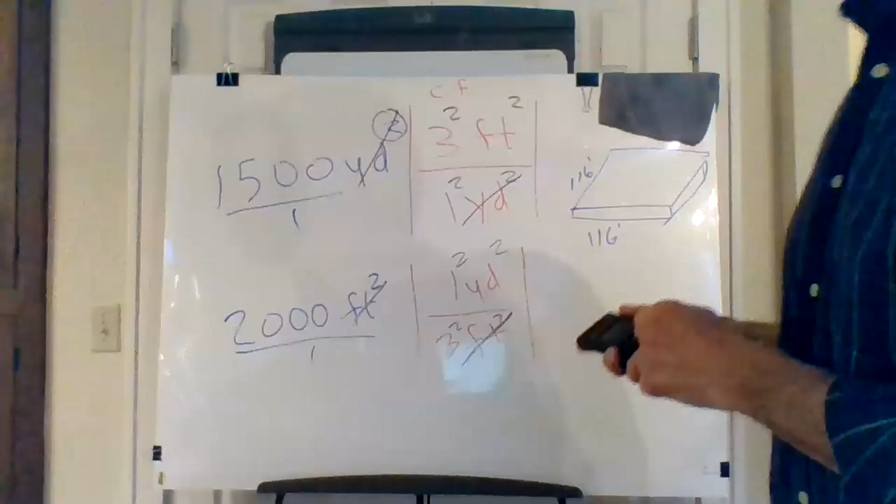Now I've got 2,000 times 1 squared divided by 9, and now I have my area in terms of square yards. So I go 2,000, hit the clear button, 2,000 divided by 9 equals. Okay, so I'm going to throw a question like that on the test.

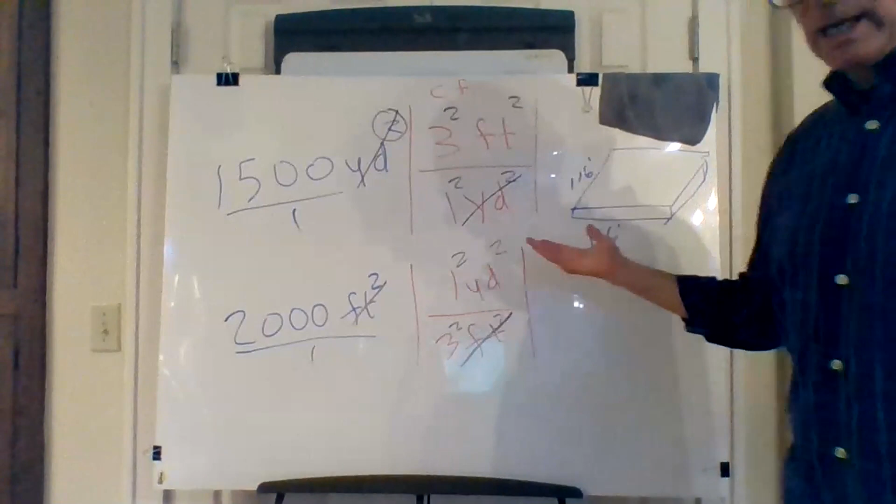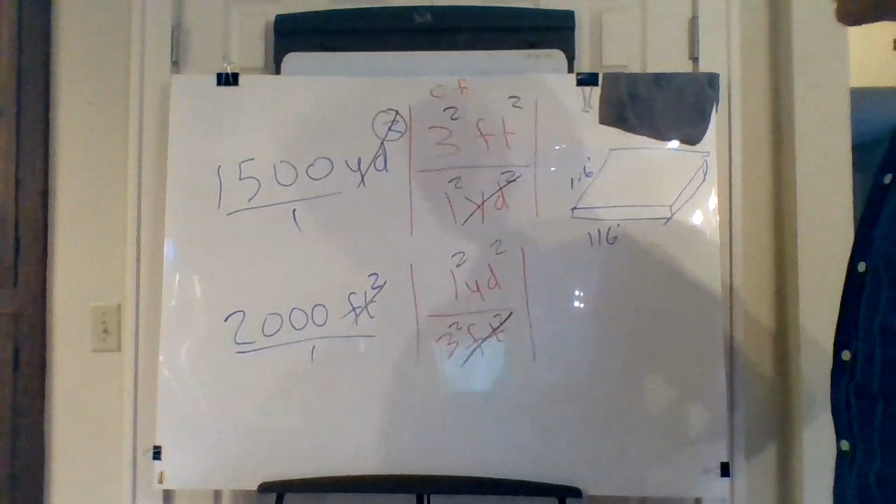You know, probably use something out of the Denver spec, and have you convert from one type of unit to another. If you master this, you'll be in great shape for statics and strengths a year from now. If you don't master it, that's where the cheese starts to bind, okay? I don't know if I can say that. Well, I did, it's America, okay? So that's a little helpful hint on units.